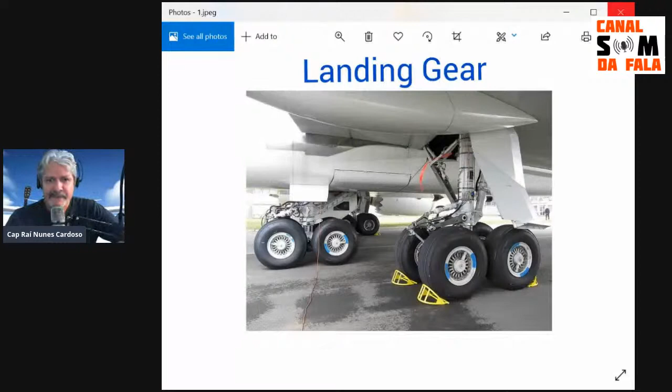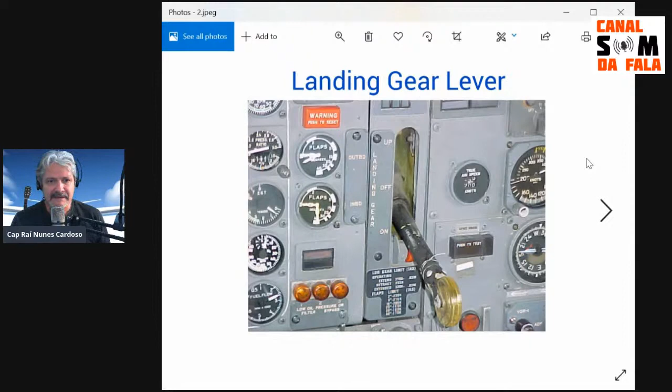So the same amount of energy you would employ to memorize landing gear, you should use to memorize a full context, a full sentence. Moving on, if I ask you to memorize landing gear lever, you have to memorize landing, then what means gear, then what means lever. You are going to spend a lot of energy just to memorize a bunch of words that have no meaning. That is not a context.

So instead of doing this, instead of only memorizing landing gear or lever or whatever, how about memorizing: the pilot put the landing gear lever up. Now we have a meaning, a context. So the point is, do not memorize words, memorize sentences, a sentence full of context with meaning.

And again, the pilot put the landing gear lever up. So instead of only memorizing landing gear and landing gear lever, memorize the pilot put the landing gear lever. Now imagine if, before using a full sentence like this, you had to memorize word by word: first pilot, then the verb to put, then landing gear, then what means lever and what means up.

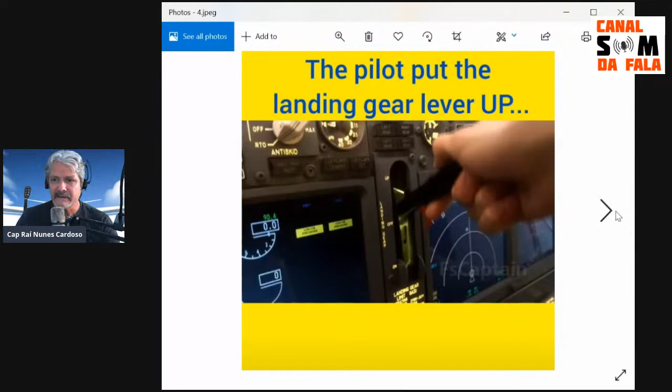Like when you learned your mother tongue as a child, what did you do? You memorized sentences, contexts, not only words. It doesn't make any sense otherwise.

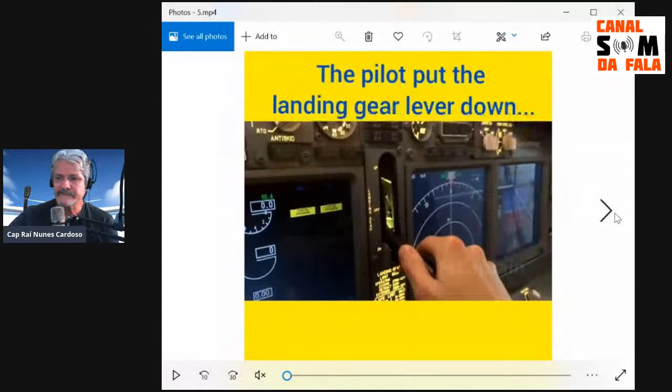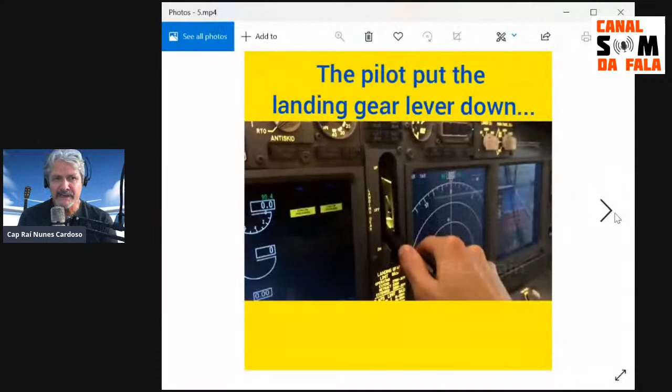Let's expand a bit. The pilot put the landing gear lever down. The pilot put the landing gear lever down. You are memorizing a context, full of meaning. And the landing gear was deployed.

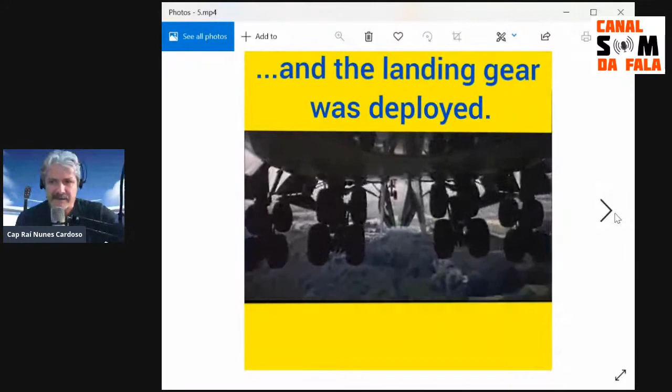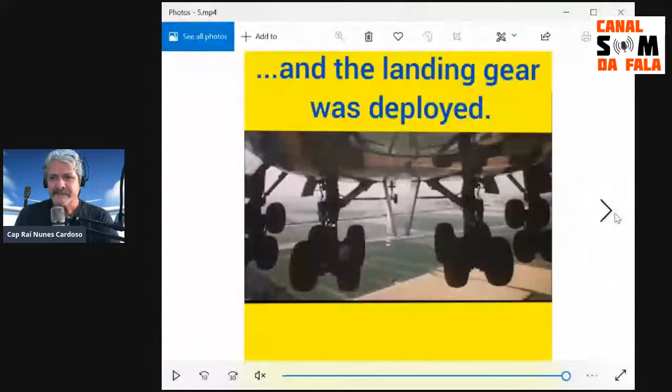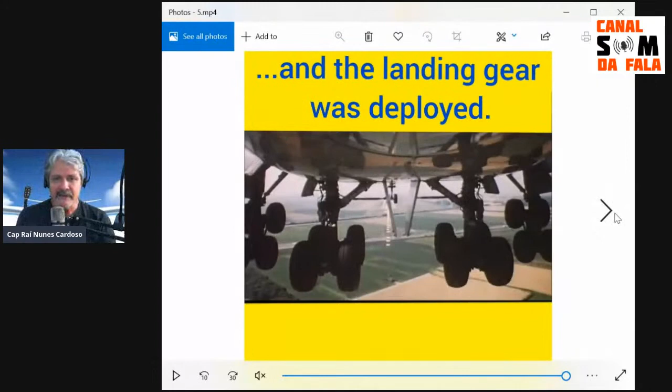Or the landing gear was dropped, or even was lowered. It doesn't matter. But now, instead of only memorizing landing, landing gear, the verb to be in the simple past, and the verb to deploy or to drop, you are memorizing a context, a sentence, and it's useful. It makes sense.

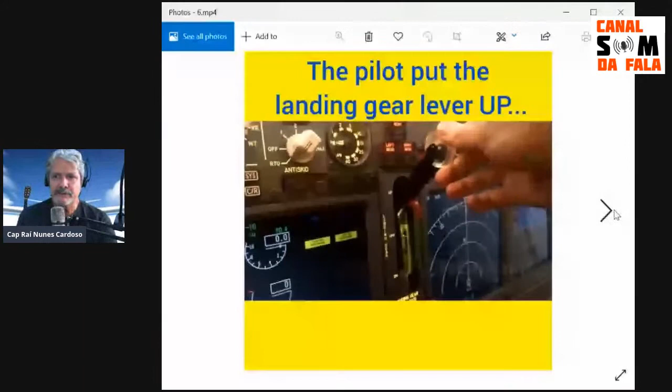Or again, still, the pilot put the landing gear lever up, instead of memorizing pilot and the verb to put and landing gear and what means lever, what means up. The pilot put the landing gear lever up, and what happened? And the landing gear was retracted.

Again, instead of memorizing landing, which can be a verb or a noun like a landing gear, and just seeing the picture, memorize a context, because memorizing just a bunch of words is useless, totally useless.

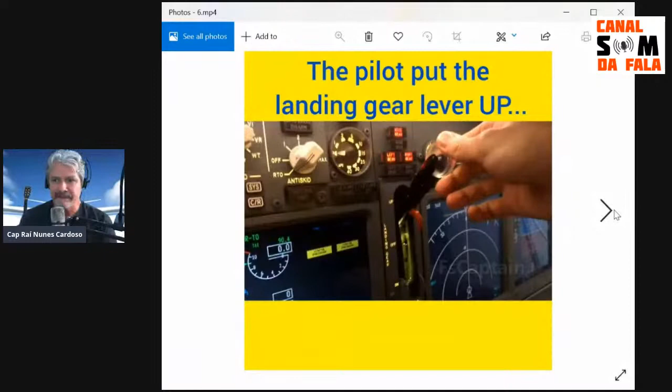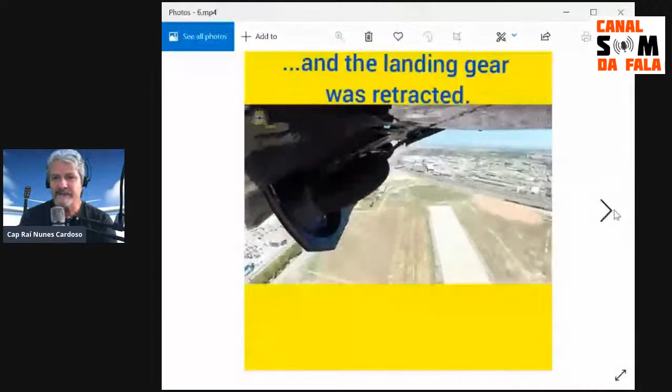So: the pilot put the landing gear lever up. It's more useful than only memorizing pilot, then landing gear, just a part of an aircraft. So memorize a picture, like a movie. And the landing gear was retracted.

Let's move on. Other word: runway. Normally in schools, people show a runway and explain this is the place where the aircraft land, and so on. This is the portion of the airport paved to receive the aircraft on their approach, the place where they land.

Like defining, giving a definition or synonyms for this, it's totally useless. Let's say a context instead. So instead of memorizing only runway, which is useless on an interview or ICAO test, you can memorize: the aircraft overran the runway because the runway was slippery, or because the runway was wet.

Now you have a context. You occupy the portion of your brain to store a full sentence, not only the word runway or aircraft, and what slippery means, because you are visualizing. So: the aircraft overran the runway because the runway was slippery.

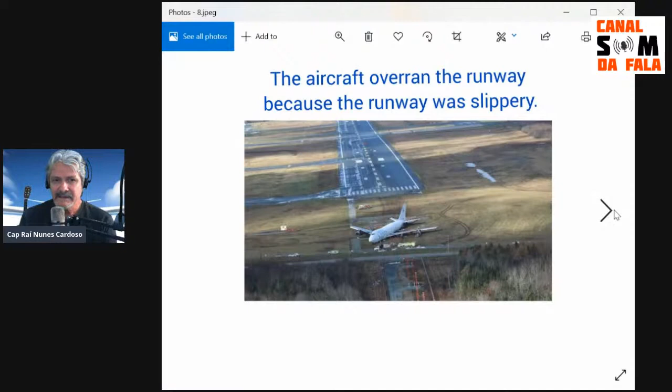Imagine before saying this, if you had to understand and memorize the verb to be in the simple past, to say was. So if I say the aircraft overran the runway because the runway was slippery, or because the runway was wet, now it makes sense. You are using your storage space on your brain to memorize a sentence, a context, and it really makes sense.

And you can also use other resources, like a musical approach. For instance, if it's too big for you, like: why did the aircraft overrun the runway? The aircraft overran the runway because the runway was wet, or because it was slippery. Normally I use this when it's like a tongue twister, very difficult to memorize and say everything as a whole.

And normally I use music myself, and I create something, because there is a music in every sentence. You just have to find it. So I use this for a big sentence that can confuse us, like this.

Why did the aircraft overrun the runway? The aircraft overran the runway because the runway was wet. The runway was wet, the runway was wet. The aircraft overran the runway because the runway was wet.